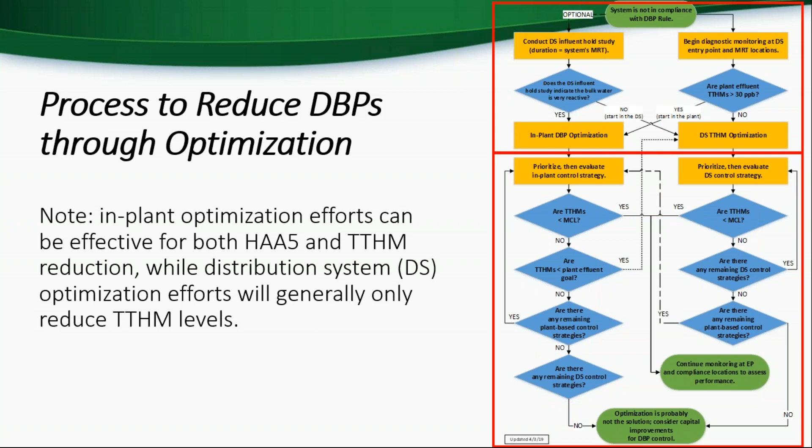The second stage is evaluating and implementing control strategies to reduce DBP formation. The first step in diagnosing DBP formation is to conduct a diagnostic monitoring study. This consists of collecting DBP samples from the distribution system entry point and maximum residence time locations to determine where the majority of DBP formation is occurring.

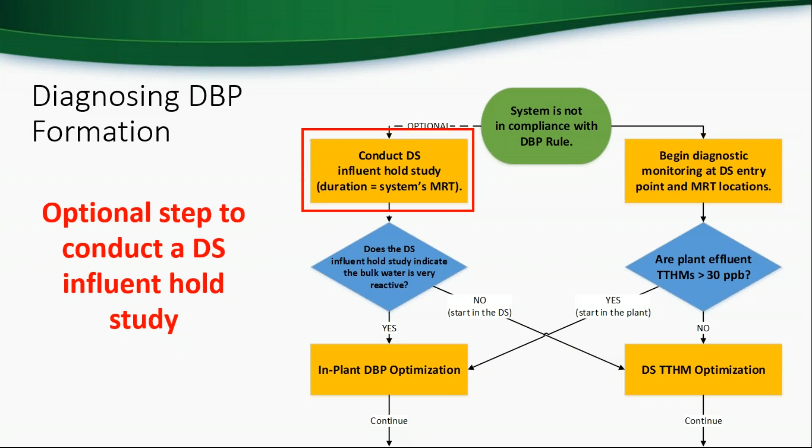In addition to the diagnostic monitoring study, an optional initial step is to conduct a distribution system influent hold study. Conducting this study may provide additional information related to disinfectant stability and DBP formation.

During webinars 2 and 3, we introduced approaches to prioritize DBP control strategies in both the treatment plant and the distribution system. The focus of today's webinar is going to be implementing DBP control strategies. This concludes the introduction portion of the webinar, and now I'm going to turn it over to Allison Dugan, also from US EPA, and she's going to provide a presentation on how to implement DBP optimization control strategies.

Thanks, Matt. Let me pull it up and we'll be good to go. All right, so as Matt mentioned, I'm going to get into some of the details of evaluating DBP control strategies.

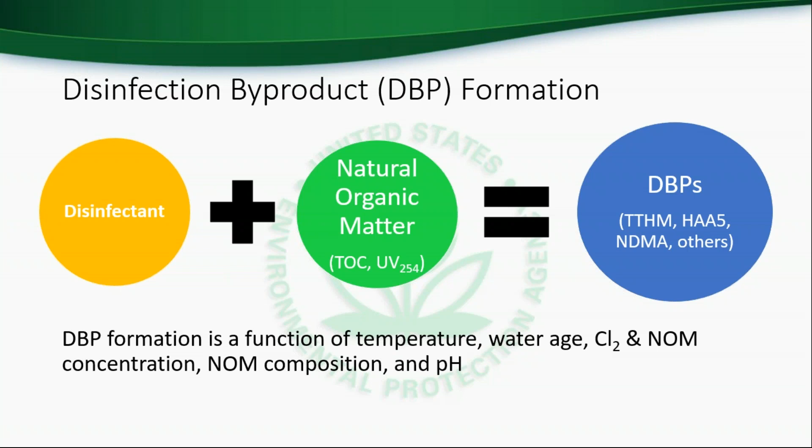Matt just pointed out that my slides are advancing, but... oh, maybe they all are. Yay. Okay, let's keep going.

You might recall from our earlier webinars that the potential operations-based changes that can be made in a water plant to reduce DBPs include optimizing oxidation or disinfection, which typically occurs in two general locations, three really. There's the pre-oxidation or pre-chlorination area, and that is what we consider prior to TOC removal.

Sorry about that. Then there's an intermediate location, which is typically like the post-sedimentation basin, top of filter location, and then finally the post-disinfection location.

While we also look at alternative pre-oxidants as part of this strategy, the real impact on DBP reduction is going to come from a system that can lower or stop chlorination in this pre-location, meaning chlorination that happens prior to TOC removal.

The second main thing that a system can do is look at lowering finished water TOC through optimized coagulation, and that includes looking at some combination of maybe coagulation dose, the coagulant they're using, and sometimes pH adjustment.

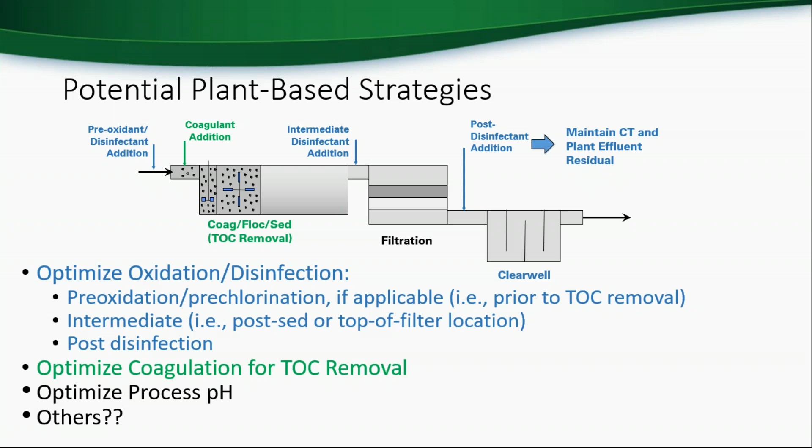Prioritizing plant-based optimization efforts was the topic of webinar 2, and as Matt mentioned, if you missed that and want more information, please refer to ASDWA's website for the webinar recording.

We've also discussed in previous webinars that there are many unintended consequences related to implementing DBP control strategies. We refer to them as unintended because they are secondary or negative impacts of implementing a strategy. However, hopefully with some planning and trying to anticipate them, they can be avoided or minimized, and it will be less of an issue for a water system as they implement the strategies.

We've listed all of them here and the two main control strategies they're typically associated with. We'll go through them more thoroughly during the presentation in the context of evaluating the DBP control strategies on the following slides. It's important to consider that some of these can be overcome, but others are going to be too difficult for a system to overcome. That's a consideration as well as you go through the process of evaluating the strategies.

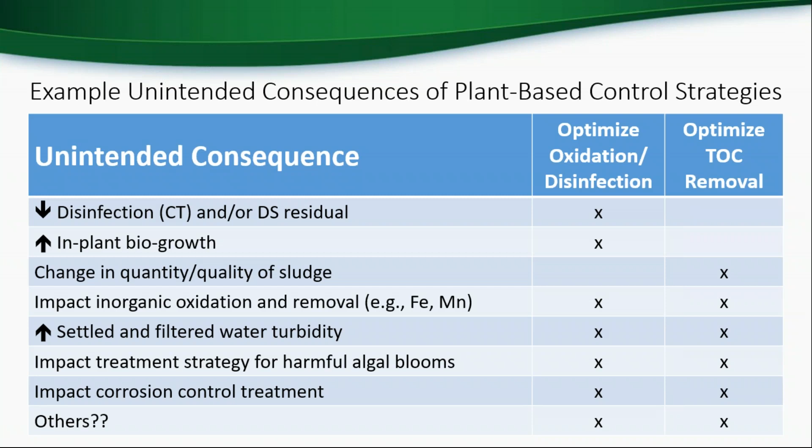Additionally, there are some resource considerations associated with the treatment strategies, which include costs associated with changing oxidation practices, optimizing coagulants, which again may require an increased chemical dose or an alternate coagulant or chemicals to adjust pH, all of which, or some combination of which, might improve TOC removal. And then there may also be cost considerations related to sludge disposal.

Costs associated with bench or pilot scale evaluations of alternate oxidants and coagulants and things like that may also be incurred by the system, as well as costs related to enhanced monitoring, whether it's monitoring equipment or additional reagents or sample analysis, whatever that might be.

There's also a resource related to staffing that needs to be considered. It might be skills development and time that they spend with optimization, or there may be other issues as well. And of course, there are other potential considerations which we haven't listed here that may come up for a system.

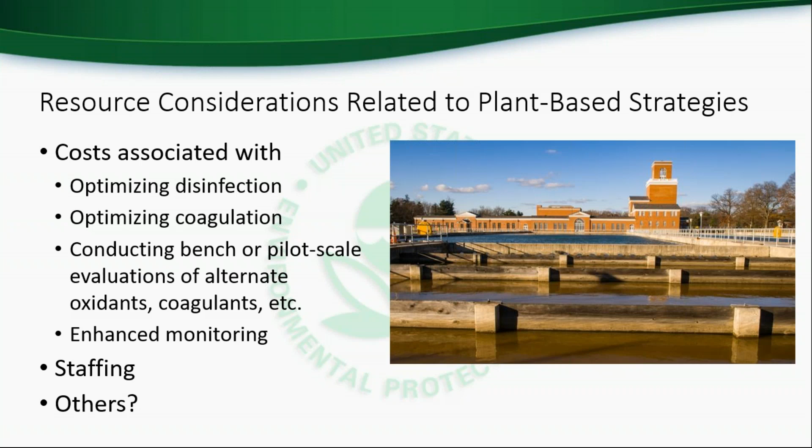So we're not really going to cover this anymore during this presentation, but we wanted to bring up some of the things that systems must weigh as they move down the path of implementing a DBP control strategy.

So shifting over to distribution system control strategies, you might recall this is primarily related to reducing water age in the system, which is generally effective for lowering THMs. Approaches to do this include managing tanks, flushing focused on water quality, and modifying system hydraulics to keep water moving through the system. Sometimes, too, design or treatment changes can be effective, and that might include something like installing a THM aeration system or a tank mixer.

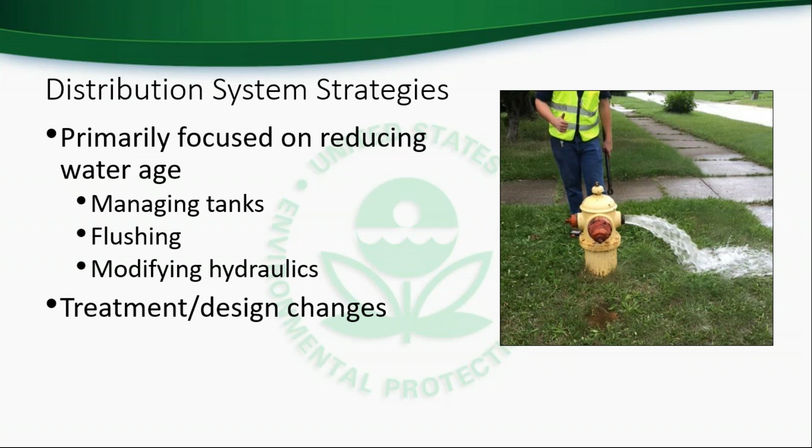And typically, these strategies can be utilized by a parent or a consecutive or purchasing system, so they have widespread applicability. Prioritizing distribution system optimization efforts was the topic of webinar 3, so if you missed that one and want more information, please refer to ASDWA's website for that recording.

As you might expect, there are unintended consequences related to modifying system hydraulics, including tanks. Some examples are listed here and on the following slides, and we're going to refer back to these slides in a little bit. So we wanted to provide them, and I'll go over these right now, but then they're also a resource.

If you, after this webinar, go ahead and apply some of this information. So some of the impacts might include reduced capacity for peak demands, such as during times of firefighting or line breaks, release of poor water quality into the system due to reducing tank levels, and low water pressure due to reduced tank levels.

That's basically going to happen when the tank levels are lowered, and if the tank is not well mixed and the water at the top of the tank that's brought into the system hasn't historically been released into the system, it might have a low chlorine residual. So this should be considered and monitored carefully if a system implements a strategy related to changing tank levels.

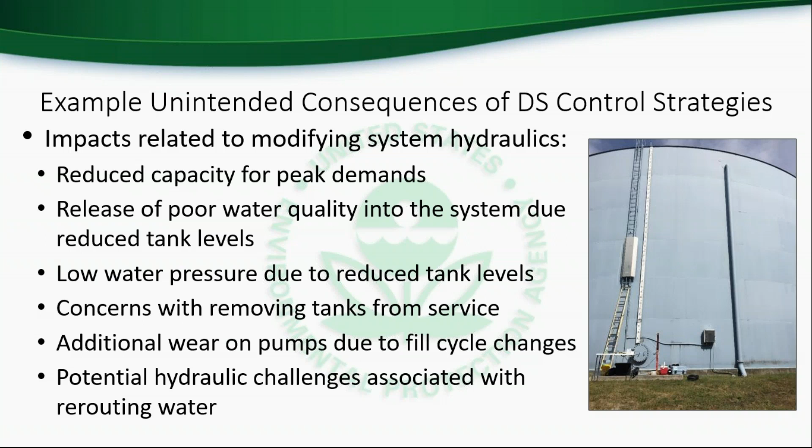And then some systems have concerns with removing tanks from service. So while that can take out some of the stored volume and potentially some of the water age out in the distribution system, that might be concerning for some. There's also additional wear on pumps due to changing tank fill cycles, and finally, potential hydraulic challenges associated with rerouting water to improve water quality.

Customer complaints may also result from implementing DBP control strategies, and some common ones include discolored water, which may result from flushing or changing flow patterns. This often results from higher velocity flushing or change in flow pattern, but there may be other things too that contribute to that as well.

And then customers may also complain if they're in an area where conservation is stressed, and there may be perceptions that flushing to improve water quality is concerning related to water conservation. And then finally, there are other unintended consequences as well, I'm sure, that you should talk with the system about if you're working with them to implement a DBP control strategy, and make sure you're mindful of that as you move forward.

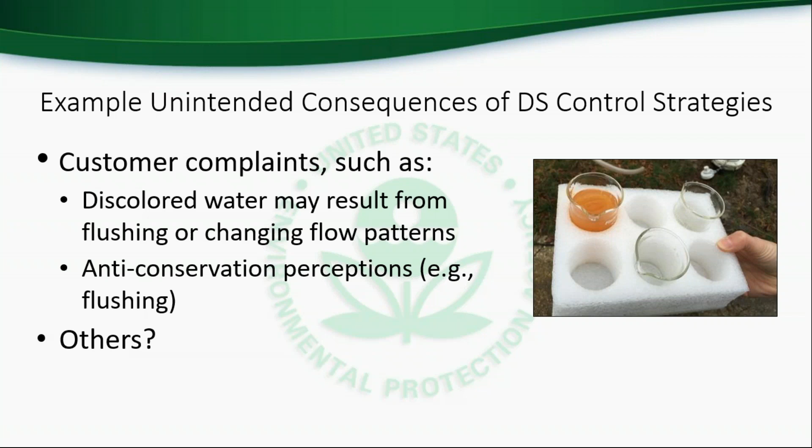So finally, here are some examples of resource considerations related to distribution system control strategies. They include costs associated with installing and operating treatment and/or design changes, such as booster disinfection, tank aeration, tank mixing devices, or flushing devices. Potentially costs related to tank maintenance services, such as inspections, cleaning, recoating, things like that, and costs related to the development and implementation of a unidirectional flushing program.

There's also resources, again, related to staffing, which we talked about a couple slides ago on the plant side of things. And then there might be concerns with revenue lost due to unbillable water, such as when a system is implementing flushing to improve water quality. And then other considerations as well, which might be system specific.

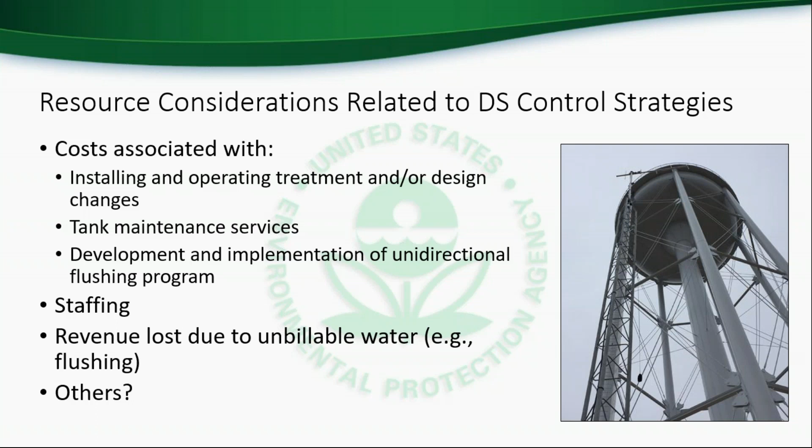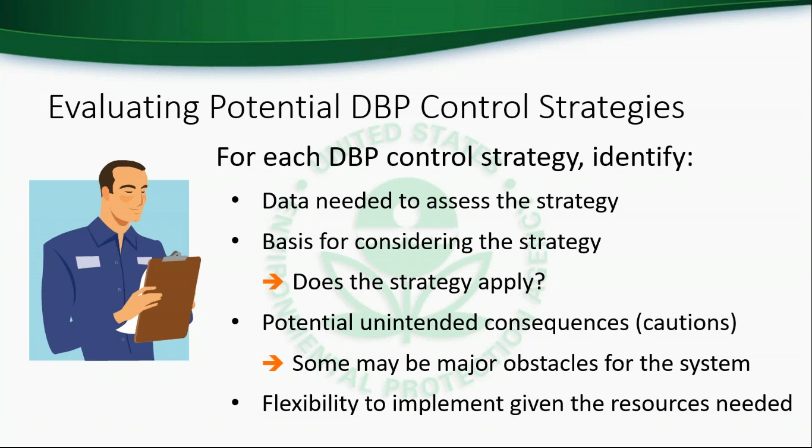Okay, so now let's get into the process for evaluating DBP control strategies. This basically boils down to gathering the data needed to assess the strategy, determining whether the strategy applies to the system, and if it does, reviewing the potential unintended consequences. As we discussed, planning for these is really the key thing. Finally, determining whether the system can implement the strategy given the resources needed.

Another thing to look at are the inactivation or CT calculations from each segment through the plant, which applies to both strategies. Finally, the raw and finished TOC can also be a consideration for this overall oxidation strategy. There are no hard and fast rules, but if the TOC in the water is relatively low and the chlorine dose is relatively high compared to the residual maintained through the plant, this implies something else in the water is exerting a chlorine demand, which needs to be considered. So you might need to collect data on inorganic parameters, potentially iron or manganese, to better assess the strategy.

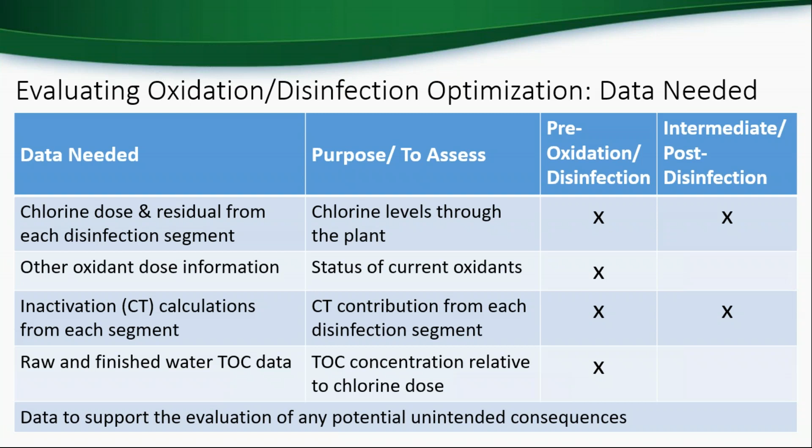So let's start with optimizing oxidation and disinfection and the basis for considering the strategy.

The first thing to consider is whether the strategy even applies to the system. If the system does not add chlorine prior to achieving TOC removal, they may still be able to optimize their pre-oxidation practices, but it might not have a significant impact on DBP formation. For this example, let's assume the system does apply. The next thing to ask is whether the system does or could achieve CT through the clear well, as opposed to needing a pre-disinfection segment to achieve adequate CT. If not, this could really limit the plant's ability to lower or eliminate pre-chlorination. But let's assume they can achieve CT through their clear well and keep moving through.

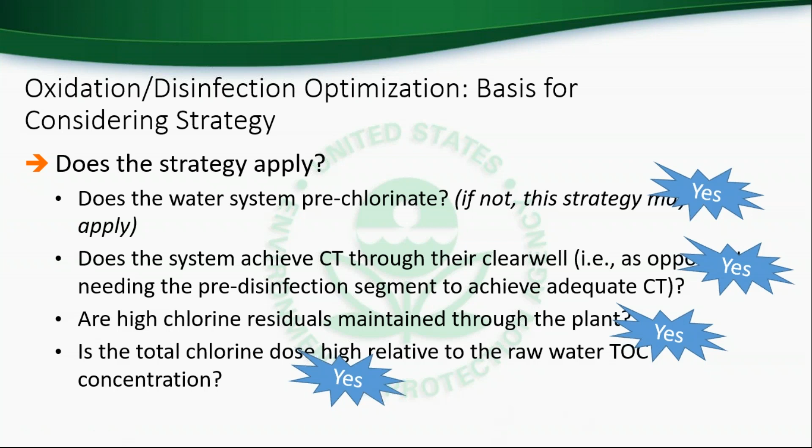The next two are somewhat lesser considerations, but assess whether high chlorine residuals are maintained through the plant. There's probably a treatment objective for this, such as to achieve CT, or it might be a case of 'that's what we've always done,' in which case you should probe that further. Finally, if total chlorine dose is relatively high relative to the TOC concentration, that might suggest room to lower the dose, but again you'd want to look into why that is. When considering whether this strategy applies, you don't necessarily need a yes answer to all these questions, but obviously the more the better in terms of potential to optimize and reduce DBPs.

Once we've determined that the strategy applies, you want to next consider the unintended consequences, which might present major obstacles for the system. Our hope is that if we think about these things ahead of time, they won't be concerning issues as the control strategies are implemented.

This first slide of unintended consequences primarily focuses on issues related to CT and in-plant disinfection. As you're assessing the strategy, look at whether a tracer study has been done to determine the contact time. If not, and a change in disinfection that impacts CT is being proposed, a tracer study will likely be needed. Similarly, determine whether their clear well is baffled, and if not, that might be needed to achieve CT. Sometimes that's a minor modification for systems and sometimes it's a more major modification, but it's going to be system specific.

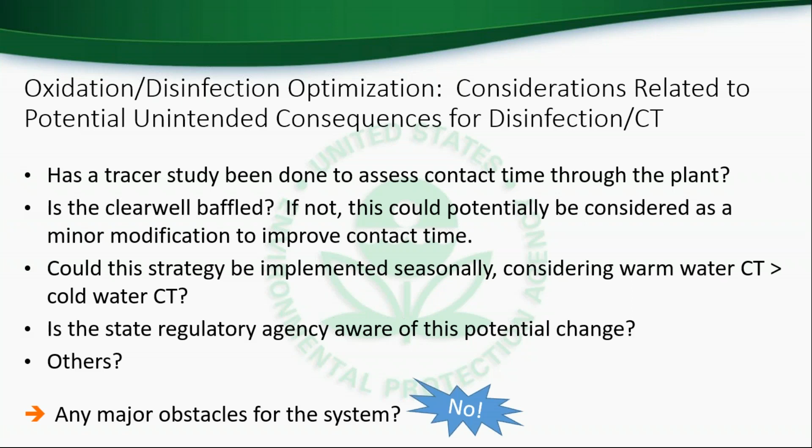Another option for systems to consider is implementing a strategy of stopping pre-chlorination seasonally, especially if the system has a hard time achieving CT in the winter but can easily do so in the summer. Any treatment change made to the system needs to be approved by the primacy agency, so water systems should make sure their state regulatory agency is aware. These are the highlights, but there may be others as well. As you assess this, determine if any of these are major obstacles for the system. If not, continue down the path of this control strategy.

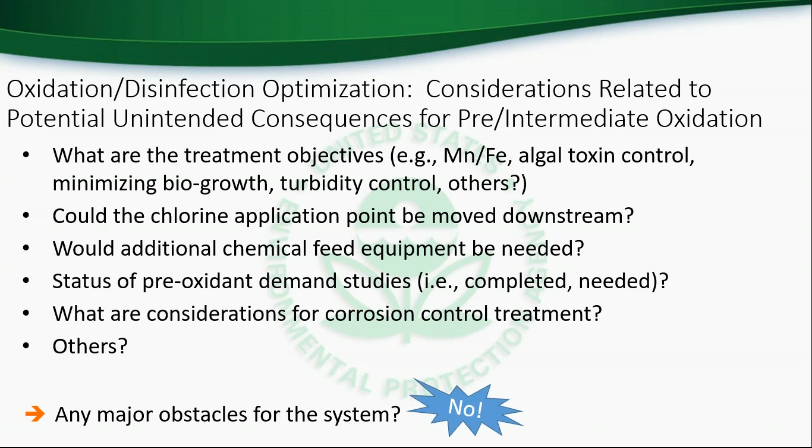On the other hand, if the system is going to stop pre-chlorinating, they'll likely need to evaluate other oxidants. You need to determine whether this has already been done, and if not, what kinds of studies might be needed before implementing this potentially at full scale. There are also likely considerations for corrosion control treatment if this change is made in the plant, and there may be other considerations as well which we haven't listed. As you consider these, again, if none are anticipated to be major obstacles, continue down the path of implementing the strategy.

Now let's look at some unintended consequences that might arise from optimizing the intermediate or post-disinfection location. At this point in the water plant, many treatment objectives related to pre-oxidation have already been addressed, so it's more a matter of making sure CT through the filters and/or clear well isn't compromised, as well as maintaining a plant effluent disinfectant residual that will maintain a residual out in the distribution system. The other thing we really want to emphasize is that reducing the disinfectant dose at the intermediate or post location typically is not going to have a measurable or significant impact on DBP formation, especially in a free chlorine system that has high water age. So compromising the amount of chlorine added at this point for the sake of DBP control is something a system should very carefully consider, because it really may not have a big impact.

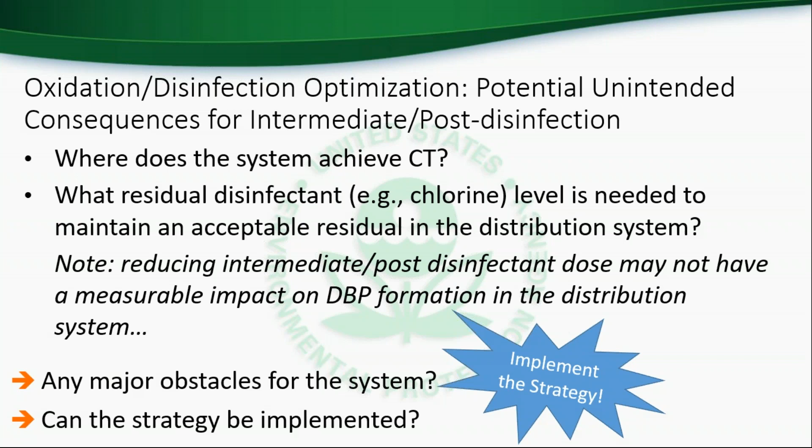So assuming the issues listed on the slide, as well as the ones we previously discussed, are not major obstacles and/or can be overcome, and the strategy can be implemented given the resources needed, the system should move forward with implementing the strategy focused on optimizing oxidation in the plant. It should be done in a stepwise manner, making gradual changes and monitoring, making sure you continue monitoring not only the impact on DBPs, but also whether the strategy might be impacting other treatment objectives, including CT. That wraps up the strategy of oxidation and disinfection optimization.

Now we're going to move over to evaluating optimized coagulation for TOC removal. The data needed for this strategy includes raw and finished water TOC data, coagulant dose and pH data. As we discussed in webinar 2, it's really good to assess whether finished water TOC tracks the raw water TOC, whether coagulant dose changes with raw water TOC, and what the level of coagulation pH is. You also need TOC performance ratio data, which will indicate whether the system has historically met the TOC removal requirements of the DBP rule, by looking at actual removal or by meeting one of the alternative compliance criteria. If the system has any recent jar test data, these might provide additional information about potential for TOC removal. Finally, any data needed to support potential unintended consequences is also going to be needed.

So when considering whether the strategy might apply to the system and whether the system has potential to optimize their coagulation practices for additional TOC removal, review the following. Are there jar test data that suggests the system has potential to achieve additional TOC removal? If so, this strongly suggests that it might be a viable strategy. And if there are no jar test data, could some jar testing potentially be done?

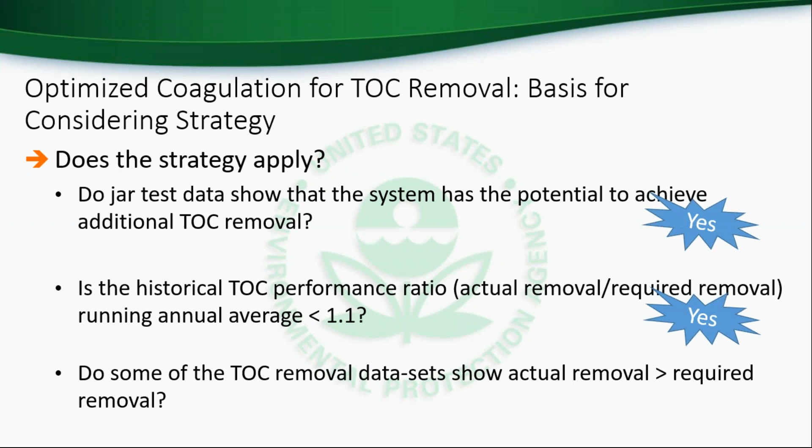So additional considerations when assessing potential for additional TOC removal include, did the system operate at a relatively constant coagulant dose with little or no consideration to raw water TOC? And so again, this might indicate that additional TOC removal could be achieved at higher doses.

Is the system using a coagulant that might not be effective for TOC removal, like maybe more of a polymer? And if so, seek to understand why they are using this coagulant and whether there might be some flexibility to make a change, of course, starting with jar testing to assess that.

Is it possible that the process pH could be further optimized for TOC removal? Generally, TOC removal is going to improve as pH decreases, but these benefits can be water and coagulant specific, so definitely something to evaluate through jar testing, but for some systems, that's a viable strategy.

And then finally, if available, is the majority of raw or treated water SUVA greater than 2? SUVA is a measure of UV254 divided by dissolved organic carbon, and a SUVA value greater than 2 suggests some potential for additional TOC removal. So if these data are available from the system, they should definitely consider that.

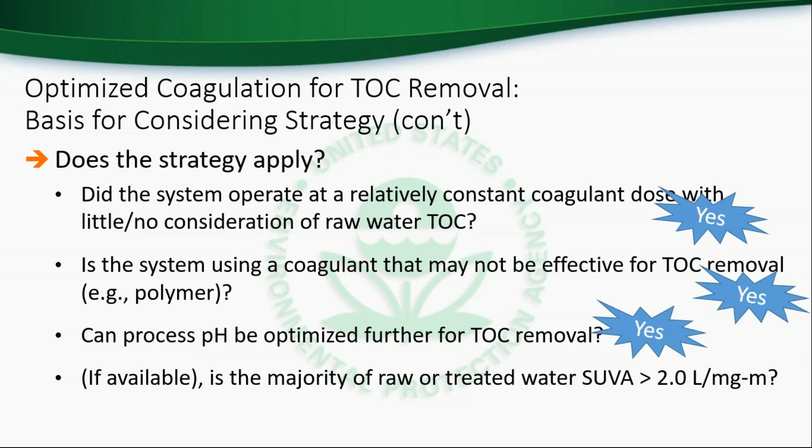Assuming the issues listed on the slide are not major obstacles and or can be overcome, and the strategy can be implemented given the resources needed, the system should move forward with implementing the strategy focused on optimizing TOC removal. Of course, this should be done in a stepwise manner, making gradual changes and monitoring not only the impact on TOC removal and DBPs, but also the impact that the strategy might have on other treatment objectives.

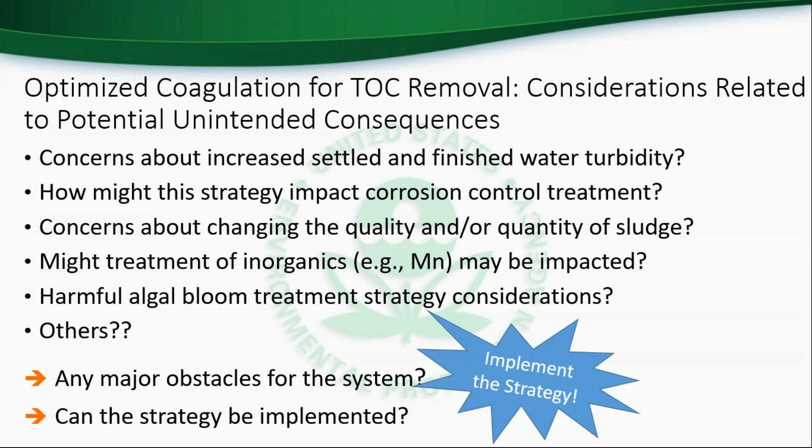Okay, finally, let's look at distribution system control strategies, starting with the data that would be needed to assess them relative to the 3 main strategies related to reducing water age, which includes managing tanks, modifying system hydraulics, and flushing. And as you can see, the data that we typically need supports most or all of these strategies.

First, if the system has any distribution system chlorine residual data, this may be indicative of areas of poor water quality or high water age in the system. Reviewing this data can provide some insight about areas of the system that might benefit from these strategies. And the chlorine residual sample locations, though, may or may not be near the DBP compliance locations.

So that may be the case that you've got residual data from areas that are away from the stage 2 locations, but sometimes implementing control strategies such as rerouting water or related to tanks can impact a larger area of the system and improve it much more holistically rather than just at that one stage 2 location. And really that's what we're seeking, is to have overall improvement in water quality in the system.

We also need information about water storage tanks that the system has, including tank level data and tank characteristics. Details about this were provided in webinar 3, and this information is used to estimate turnover time and mixing characteristics of the system's tanks using the spreadsheet we provided in that last webinar. If you're not familiar with that, I'd encourage you to go back to the last webinar and take a look. Also, in the area of AWWA's website that provides a link to the webinar, you can download the tank spreadsheet and the protocol for using it.

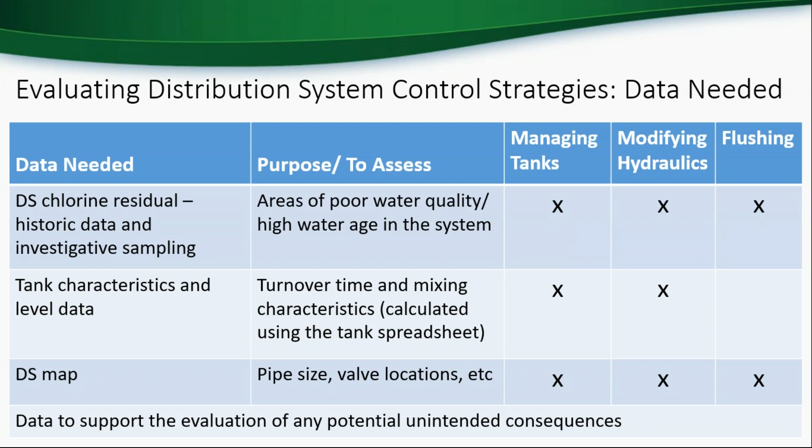And then finally, any data needed to support the evaluation of potential unintended consequences is also helpful, and that might include pressure data or customer complaint information. And if this kind of information can be shown on the map, that's even better.

We discussed in earlier webinars that distribution system optimization is most likely going to be most effective in systems that meet the following criteria, and this is the basis for considering the strategy. In a system that has plant effluent THMs less than around 30 parts per billion, that suggests water age rather than treatment is contributing to the elevated DBPs. If you find that the system has not optimized treatment and the THMs are significantly greater than 30 at the plant effluent location, distribution strategies can still be implemented, but often both plant and distribution system optimization will be needed to reduce DBPs to a desired level.

Similarly, the results from the hold study suggest that the bulk water is not very reactive, and again these are the samples collected from the bottles throughout the hold study. This implies that the plant may already be optimized with respect to DBP control, and that water age in the distribution system may be contributing to low residuals and elevated DBPs. And then finally, the system still has potential to optimize in their distribution system because they've not fully implemented distribution system optimization related to tank operations, flushing programs, system hydraulics, et cetera. Then they would be a good candidate for pursuing distribution system optimization.

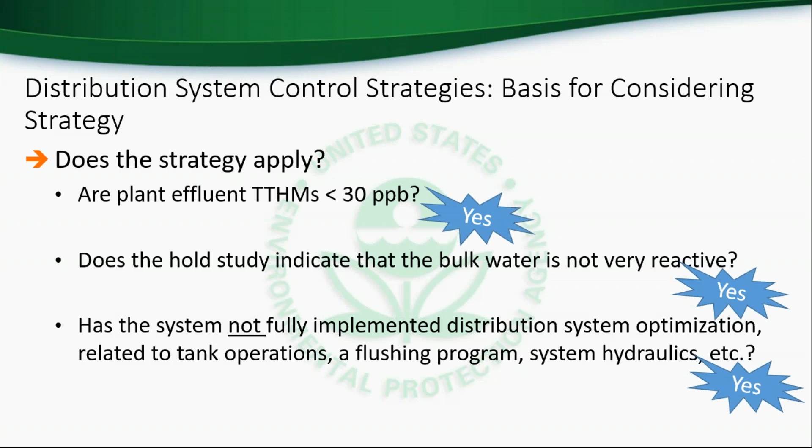The unintended consequences associated with distribution system control strategies fall into a few main categories, including customer complaints related to water quality, operational activities, and things like pressure, hydraulic concerns, which might include challenges related to maintaining pressure, issues that might arise from rerouting water, which may also spark some customer complaints. And then, of course, there's our nebulous others category, which systems may have to deal with, and those are going to be system specific. I presented these earlier on slides 9 through 11, so in the interest of time, I'm not going to relist them.

So assuming none of these are major obstacles that the system cannot work around, and that distribution system optimization can be implemented given the resources needed, the system should move forward with these types of strategies. Again, it should be done in a stepwise manner, making gradual changes. In other words, don't change all the tank levels at once. Also, monitoring in the distribution system should be done not only to assess the impact on DBPs quarterly, but also the impact on other water quality parameters such as disinfectant residual, pH, and temperature, and other parameters of concern, which you'd probably want to monitor on a much more frequent basis than quarterly.

So in summary, this process might seem overwhelming, but really it boils down to pulling together the system information related to water quality and operations that you need to assess the strategy, determining whether this strategy would apply to the water system you're working with, and then considering the potential unintended consequences and resource needs for the strategy. And if the system has the flexibility to implement the strategy, we encourage you to develop an implementation approach that includes careful, stepwise implementation and monitoring to understand the impact of the strategy and potential unintended consequences.

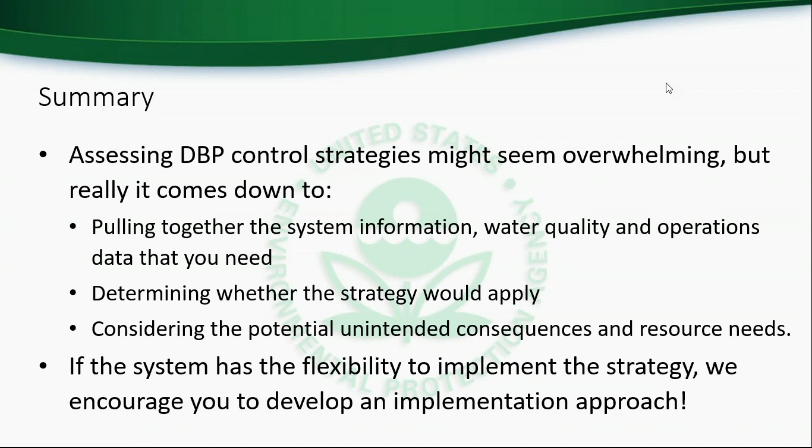So with that, I am going to pass this over to Jackie Logston from the state of Kentucky, who is going to talk about a case study with her systems, with a group of her systems.

Hello, my name is Jackie Logston, and I provide drinking water technical assistance with the Kentucky Division of Water, Department for Environmental Protection. I'm going to talk about a lot of the same things that Allison was talking about, through a case study. She said at the very end that a lot of this can seem overwhelming, and that's true. Keep in mind as I go through my presentation that this is work that has been occurring over the course of the last 4 years or so, so you're really not going to be addressing everything all at once.

Okay, if I can get my slides to advance. Let's see here. I'm not sure. Jackie, this is Allison, I had a little trouble with it too. I finally ended up hitting one of the arrow buttons. I tried page down, I tried a click of the mouse. There we go, I got it. Yep, okay, and we got it here too. Thanks, right, thank you Allison.

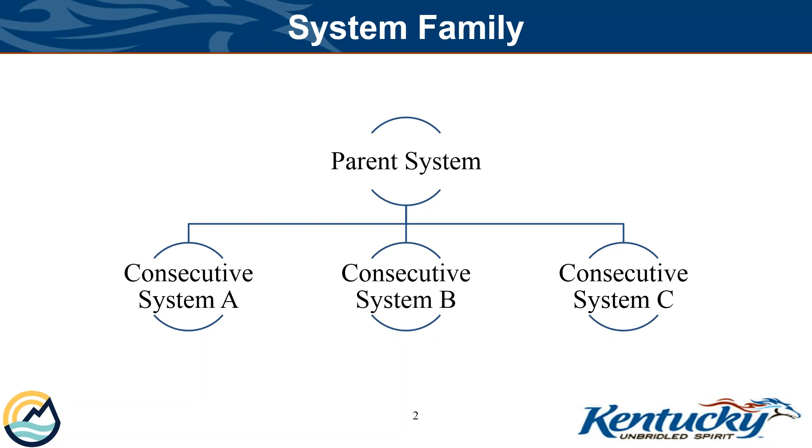Okay, so I'm going to talk to you about a system family that's located in the region of Kentucky that I cover. It consists of a parent system with 3 consecutive systems. As I go through talking about these systems with you, I'll refer to them as consecutive system A, B, and C. Starting with the parent system, they have an 8 MGD water treatment plant with membrane filtration with an average daily demand of about 2.6 million gallons per day.

They have 4 distribution system storage tanks with a combined capacity of 7.5 million gallons. With this system, you can see with the combined capacity of the tanks, they've got a lot of oversized lines and a lot of parallel lines. This is kind of a good example of they had the money and just built it as big as you can. And now they're really having to deal with the unintended consequences of all that extra water.

They provide 100% coverage to the 3 consecutive systems that I'm going to talk about today. They do provide a small portion of water to a 4th consecutive system, but that system gets the majority of their water from another parent system, so I didn't include them in this case study. The parent system serves a system population of about 28,000 with a combined population of about 38,000.

The first DBP violation that they received was for TTHMs, and that happened in the 3rd quarter of 2016. Remember that date because I'm going to go back to that here in just a minute. They returned to compliance in the 3rd quarter of 2017.

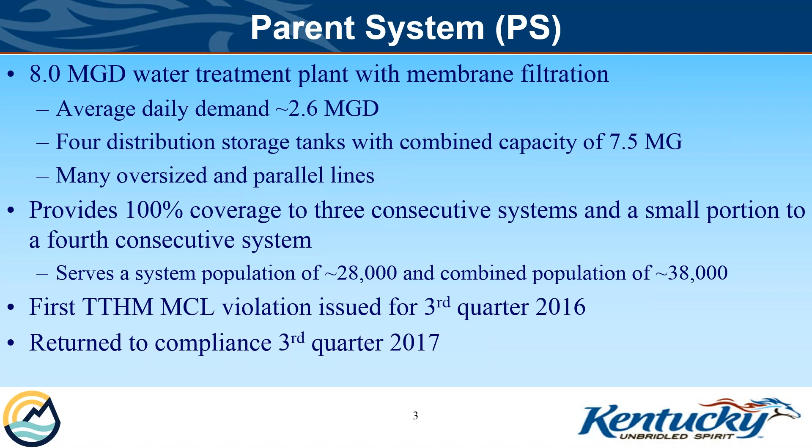A little background on consecutive system A. They purchase all of their water through one master meter served via a 16-inch line. And truth be told, that 16-inch line acts pretty much like an underground storage tank because there's not a lot of usage on that transmission line serving that master meter. They also have 2 distribution system tanks with a combined capacity of about 600,000 gallons.

They serve a small population of about 1,400. Their first violation was for TTHMs, and that happened in the 3rd quarter of 2014. So with the parent system, they got their violation in '16, which was 2 years after the consecutive system was out of compliance - I'll talk more about that in a little bit. They returned to compliance in the 4th quarter of 2017.

Consecutive system B, again, purchases all their water through one master meter served via a 10-inch line. They have 3 distribution tanks with a combined capacity of about 500,000 gallons. They serve a population of about 4,700. Their first TTHM violation was also the 4th quarter of 2014.

With these consecutive systems, they all went into violation at the same time because it happened as soon as they had 4 quarters of stage 2 monitoring data. So as soon as compliance kicked in, they were all out of compliance from the very beginning of that. They also returned to compliance in the 4th quarter of 2017.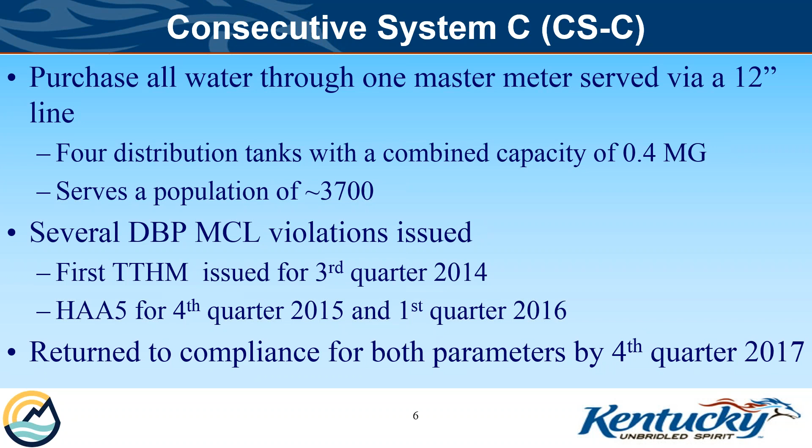They've had several violations as well, beginning with the 3rd quarter of 2014 like the others. They also had 2 violations, 2 quarters where they were out of compliance with HAAs, and also returned to compliance like the other consecutive systems by the 4th quarter of 2017.

Something we've done in Kentucky is implement the distribution system optimization training, and we've had a large success using this training. It was a situation where we had a lot of systems out of compliance whenever stage 2 kicked in, and a lot of them were consecutive systems. We really needed a way to reach all of these systems, as many as we could, as quickly as we could, to start getting this information out to them. So this distribution system optimization training really fit in well.

The first one we conducted was in August of 2015. This is the one that included the system family I'm talking about today. We open the training up and host them regionally, and now we've had several in different locations across the state.

We invite, in particular, systems that are having compliance issues, but we open it to all systems in the area. When we have a system out of compliance, if it's a consecutive system, we also try to get the parent system in the training, whether they're out of compliance or not, because it really helps to get systems working together.

In this case, the parent system and all 3 consecutive systems attended the training. At the time, the parent system was still in compliance, but the consecutive systems were in violation. When systems are referred to enforcement, they have to submit a corrective action plan telling us what actions they'll take to return to compliance. These systems were able to include attending this training as one of the items in their corrective action plan. The training was well received, but they still needed some additional encouragement to start implementing these strategies and working together.

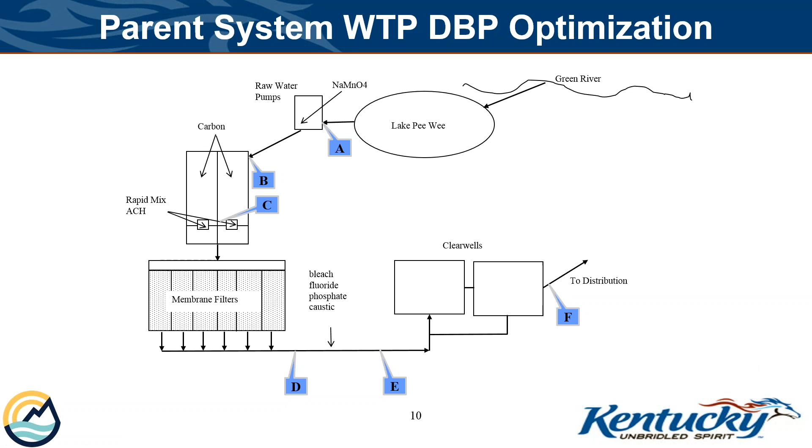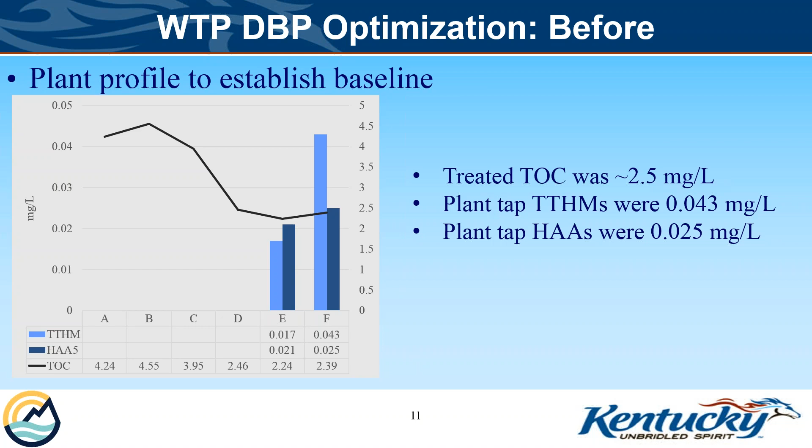To establish a baseline, we conducted a plant profile. If I go back to this for a second, you can see the different areas—A, B, C, D, E, F—were the sites where I collected samples to conduct the profile. The goal was to try to capture what was happening with each treatment process. We started out with a TOC of about 2.5 milligrams per liter. Plant tap TTHMs were about 43 parts per billion, and the HAAs were 25 parts per billion. So that's what we had initially.

Our potential control strategies were to improve TOC removal and optimize pre-oxidation. We really did most of the work through jar testing to establish if it was an applicable control strategy they could implement. Again, they were limited on the coagulation process, and also on the types of coagulants they could use because of the membrane filtration process. We did some jar testing to determine proper dosage, but there wasn't a huge change in what they were doing with their coagulant.

The pre-oxidant—like I said, they were already feeding sodium permanganate. They did explore other options, but decided sodium permanganate really was the best. They have some manganese issues at different times during the year, and find permanganate is most effective for that process. So some time was spent making sure they were feeding the sodium permanganate at the right location, feeding it to demand.

A lot of time was spent optimizing the carbon feed. They are limited again, because of the membrane filtration, on the types of carbon they can feed—in particular, it's called the gold number. A carbon that is too sharp can damage the membrane filters, the fibers.

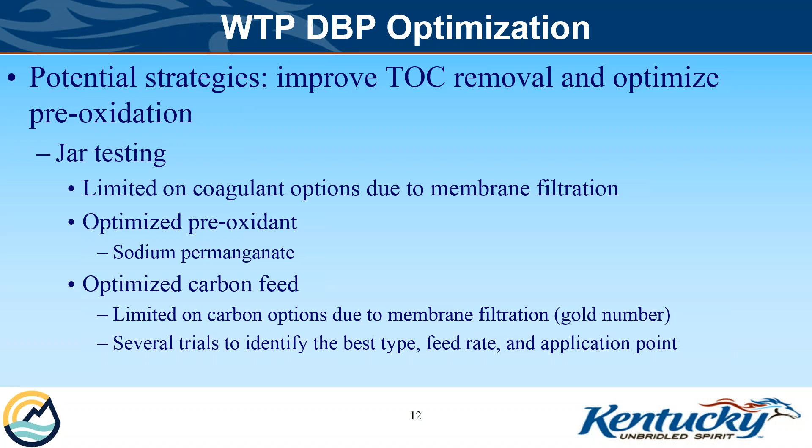impacted the results that they got from their carbon feed. And again, this was a process, several months worth of jar testing and trials, but they saw some improvements for sure. Some improvements that made a pretty big impact out in the distribution system because they were changing that reactivity of that water, making it more stable.

And so there was a drop from a 2.4 to a 1.7 on the TOC, treated TOC, and then the TTHMs went from a 43 to a 26. I don't have the HAA5 data here because this was done in-house, and they have a THM analyzer. I know that type of purchase is not always an option for some of the smaller systems, but that was

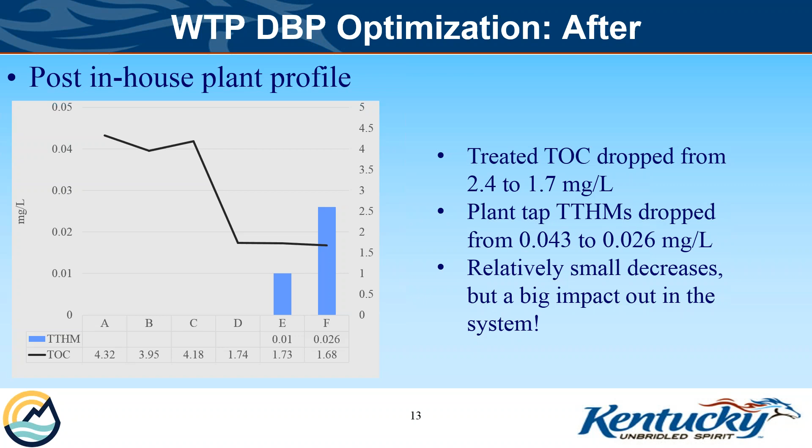something that they were able to purchase and have utilized. And so you can see that the work that was done at the water plant, and you know, this was a system that was doing a good job. They were not pre-chlorinating, and they had membrane filters, and they felt like they were doing a really good job, and they were, but it was a situation where they could still make some improvements that would have an impact.

And then still talking about the parent system, moving out to the distribution system, they started implementing some of the control strategies that they learned through the distribution system optimization training. One of the first things that we do in that training, and there's a workshop within that training on identifying critical sites, critical locations for increasing the monitoring out in the distribution system. And like Allison said, it really is about the water quality throughout the entire system, not just at those compliance sites. So critical locations would be dead ends, large oversized mains, parallel lines, low flow areas, tank effluent, areas

in the system that you know you have challenges with the chlorine. And the two things that they were monitoring were chlorine and TTHM, because again, they had that in-house THM analyzer, and they can run those tests pretty inexpensively and pretty quickly. So they were able to gather up a lot of data in the distribution system.

They also installed a monitoring panel at the main 3 million gallon tank. That tank that I'm referring to, all of the water that serves the whole system and the consecutive systems, all the water goes through that tank first before it's disseminated out into the distribution system. And so it was just a great asset to have that real live data where they could see the chlorine and the pH and the turbidity, conductivity, pressure going in and out of that tank at all times.

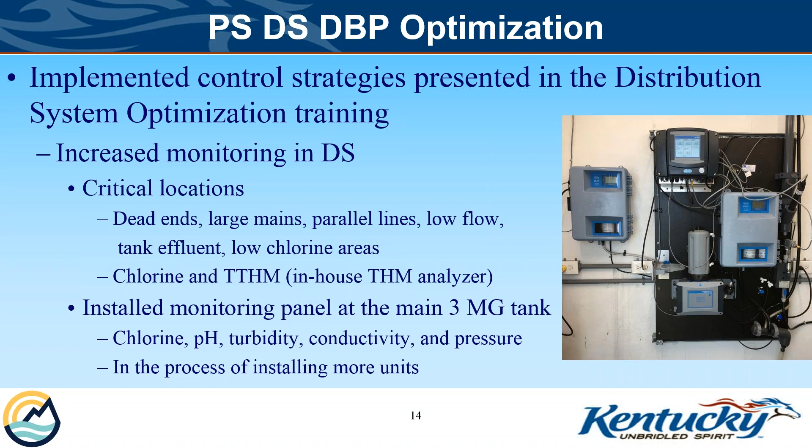They're also in the process now of installing more units at other areas in the distribution system because they find this data so valuable. So they increased their monitoring.

The next step was looking at optimizing tank operations. And Allison touched on this in her presentation, they had to consider, and again, the unintended consequences, but they were looking at how much could we lower tank levels without impeding pressure or fire protection and that sort of thing. They were able to make some tank level adjustments and also change some of the operations with their fill and draw levels to encourage better turnover in their tanks.

They cleaned some of their storage tanks, and the biggest improvement that they made was to that main tank that I talked about on the last slide. They recoated the interior. It had been a long time since the tank had been taken down and cleaned. There was some corrosion issues in the tank. There was stagnation issues in the tank. So they recoated the interior and they installed a mixing system.

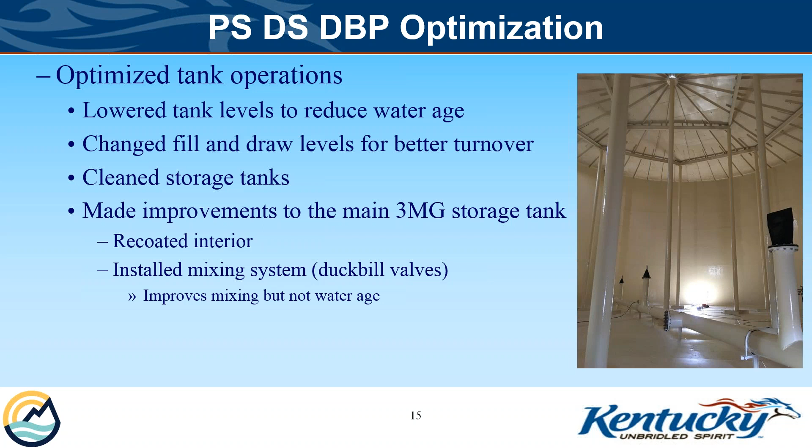And I want to make sure and tell you here that mixers improve the mixing, but not the water age. So you still have to have some movement in and out of that tank to keep the water fresh. If you're mixing old water, it's still old water. But a mixing system can be beneficial in a situation like this one for sure.

Again, this system had what they considered a good flushing program. The entire system was being flushed two times a year, but there were some improvements that they could make to it. So they do try to do some unidirectional flushing where they can. That's not always possible, but conventional flushing along with that, they do that twice a year.

They also do some low velocity flushing, we call it soft flushing, in critical areas quarterly. This is in areas where they were having some chlorine issues, or using that THM analyzer, they knew they had some areas. They're looking at the whole system, not just their compliance sites, but where in the system they see the THMs increasing, using that to do some turnover flushing where they're doing the cleaning, the scouring twice a year, but on a more regular basis they're turning that water over because they have so much storage and so many large lines, keeping that water turned over.

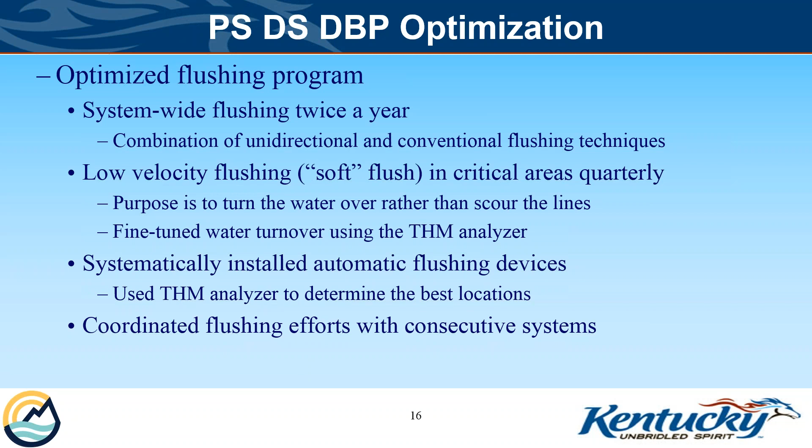They also systematically installed automatic flushing devices, and again use that THM analyzer to determine the best locations. And then something else that came out of that first meeting was coordinated flushing efforts with their consecutive systems. They would let the consecutive systems know when they were going to be flushing, so the consecutive systems could piggyback off of their flushing, so that when they started flushing from their master meter, they were pulling through that freshly flushed water from their parent system.

They also did some valving manipulation to eliminate some hydraulic dead ends and get water flowing in different directions. And they're working on a plan to eliminate some of the parallel lines. So they are trying to address that in some manner, but that's a difficult fix. It can be expensive because they may have two lines running together, a situation where it was a small line, they needed more capacity, and instead of upgrading the line they laid another one next to it and had customers tapped into each of them. So that's going to be a long process for them, but it is something that they're addressing.

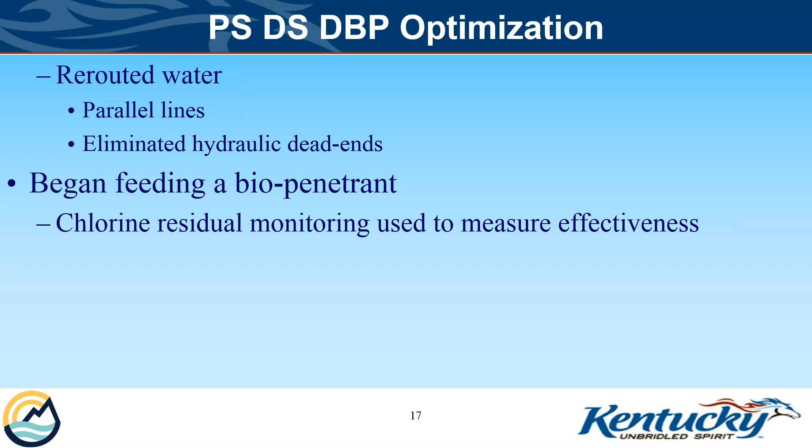And then something else that they did, separate from what came out of the optimization training, was that they began feeding a biopenetrant at this system, to address any biofilm issues that they may have had out in their distribution system. And they monitored the effectiveness of it by chlorine residual monitoring.

This chart here is looking at the long-term trend of the trihalomethanes. It is taking the maximum LRAA from each quarter and doing an average of the max LRAA. The solid line is the long-term goal, set at 60 for all of their sites, figuring in the max. The average is the dotted line, and you can see that they're falling below that long-term goal. This is the parent system, and of course the 80 is the MCL, but this system went from being out of compliance to now meeting optimization goals. So that's quite a success that they have demonstrated there with the control strategies that they implemented.

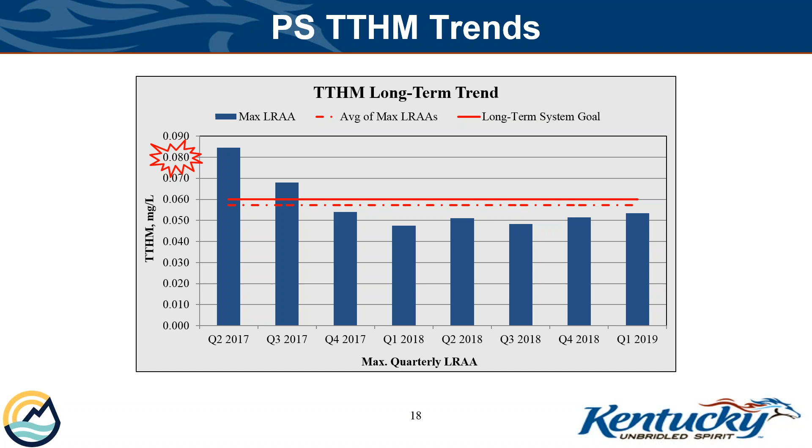There is a tank influent and a tank effluent. They have two tanks in this system. We just included one of the tanks in the profile, and that tank had a separate inlet and outlet, but it was a unique setup because that tank was used for fire protection for an industry. So the effluent was actually a riser pipe in that tank that would keep it from falling below a certain level. The water would become stagnated, but there were several feet of water at the bottom that could not get out because of that riser, to maintain a minimum level in the tank. So that was one of the challenges they were looking at there.

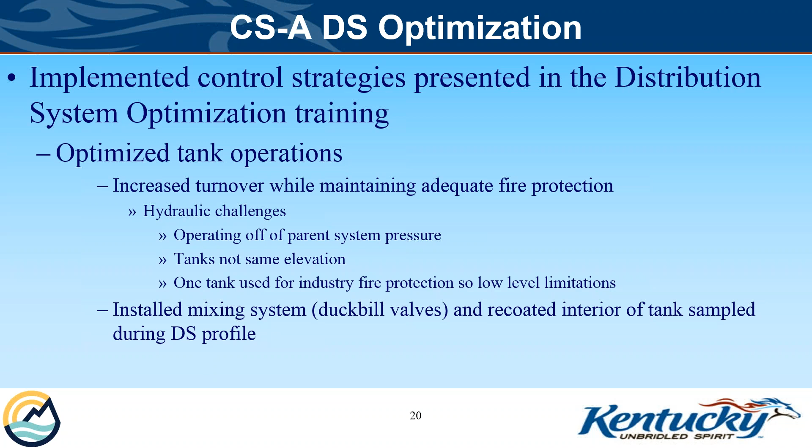Those were the things they had to evaluate when changing tank operations. They really ran into hydraulic challenges in this system because they were operating off the parent system pressure, and the two tanks they have do not operate on the same elevation, with a different elevation from the parent system. I also talked about the tank used for fire protection with that riser pipe. They went into that tank in particular and removed the riser pipe, so they didn't have that issue anymore. They also recoated the interior of the tank due to corrosion issues, and installed the same duckbill valve mixing system in that tank.

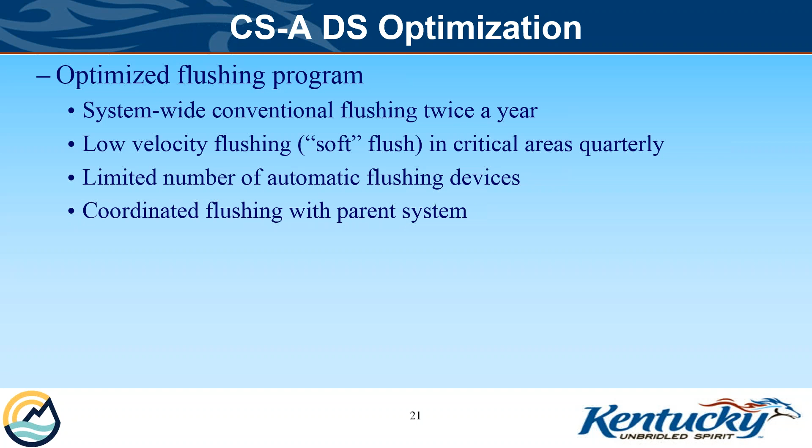Optimization efforts for their flushing program include a system-wide conventional flushing, aiming for twice a year. They do some low velocity soft flushing in critical areas quarterly, again looking at the whole system, not just compliance site areas. They were able to install a limited number of automatic flushing devices, and coordinated flushing with the parent system.

I'll move on now to consecutive system B. Again, we conducted some diagnostic monitoring of that system, and one of the sites that they were really challenged at, their two compliance sites, would be the SM2 and the SM4.

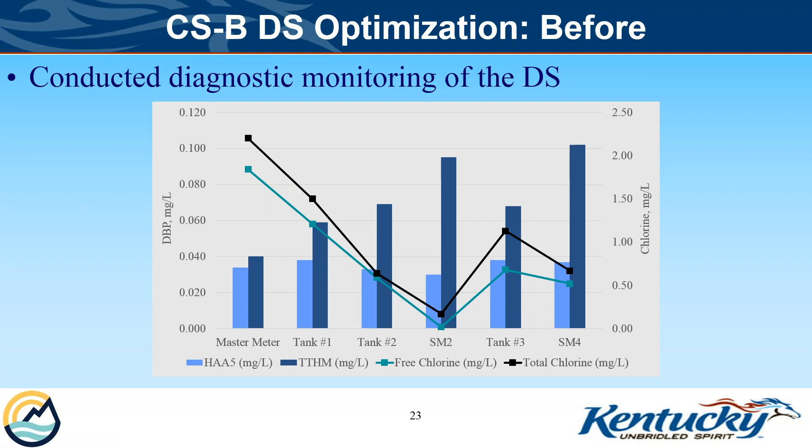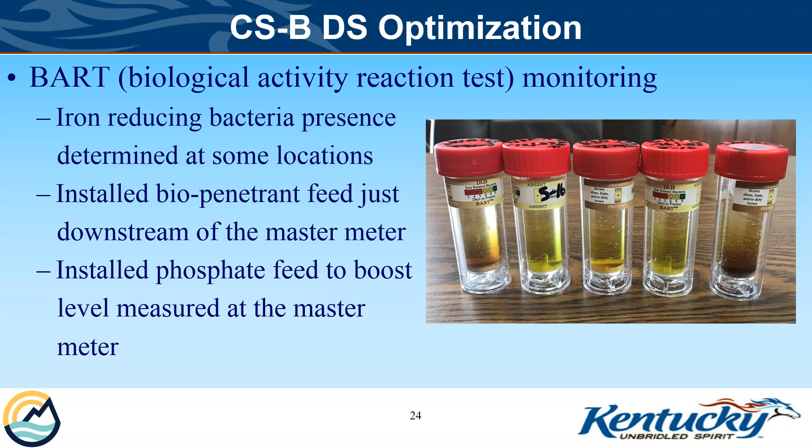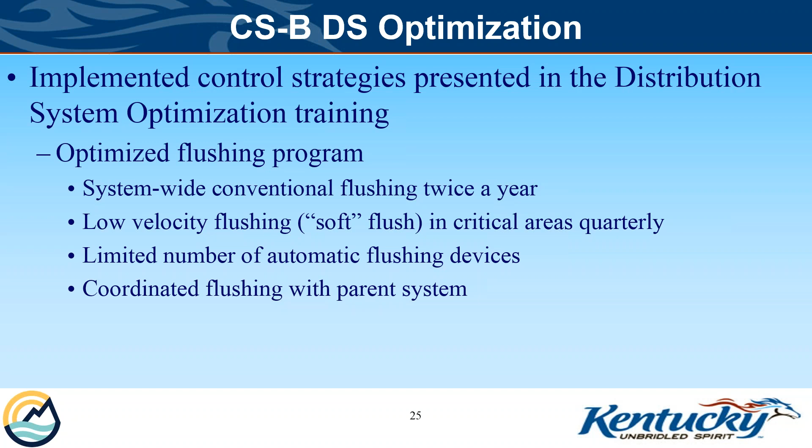A similar flushing program with this system: they try to do a system-wide conventional flush twice a year. They also do some low velocity flushing to turn over those long lines, since these consecutive systems are rural areas in Kentucky - long lines with a low number of customers going way out. Keeping those lines turned over is essential in keeping good chlorine residual and keeping the water age down. And they also coordinated flushing with the parent system.

With their tanks, they made some adjustments where they could to the fill and draw levels to increase turnover. They believe they lowered some levels in some of their tanks to reduce the amount of water in storage. They also had the duckbill valve systems installed in all of their tanks and cleaned all of their tanks as well.

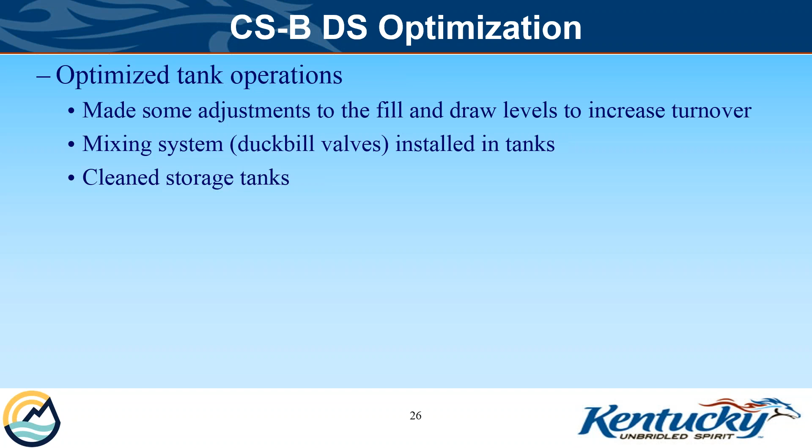They implemented control strategies that they learned in the training as well. A challenge that this system had was they have a limited number of flush points. They don't have that many fire hydrants. It's not a fire rated system. Again, we're talking a rural area, but they just don't have very many flush hydrants either. So they do the best that they can flushing, but that is a big challenge still to this day, and that's something that's going to come with time and money, is to install more flush hydrants so that they can turn the system over better.

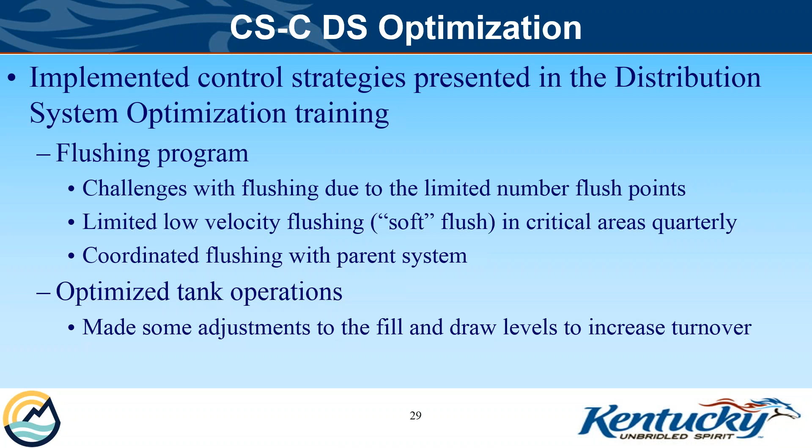And then with their tank operations, they did make some adjustments to the fill and draw levels to increase turnover, and lowered some tank levels in areas where they could without having a negative impact on pressure.

So really what we learned through all of this is that the success that these systems achieved really required a holistic approach. Without the parent system being willing... and they started their work before they were out of compliance, but it really took them being aware of the system as a whole, not just their little kingdom, but the system as a whole, and everyone working together.

All of the systems have maintained compliance since the third and fourth quarters of 2017, and some of them are even achieving optimization goals. So we consider that a great success.

Like I said earlier, they've continued meeting on an annual basis. They get together for lunch and they talk about compliance. Sometimes I'll go and give a little presentation on what everybody's numbers look like. They talk about coordinated efforts, any projects that any of them have going on, sampling with the THM analyzer that the parent system owns. They do sampling for their consecutive systems if they want them to do that. I think that this is just really a great example of the benefit gained by communicating and working together.

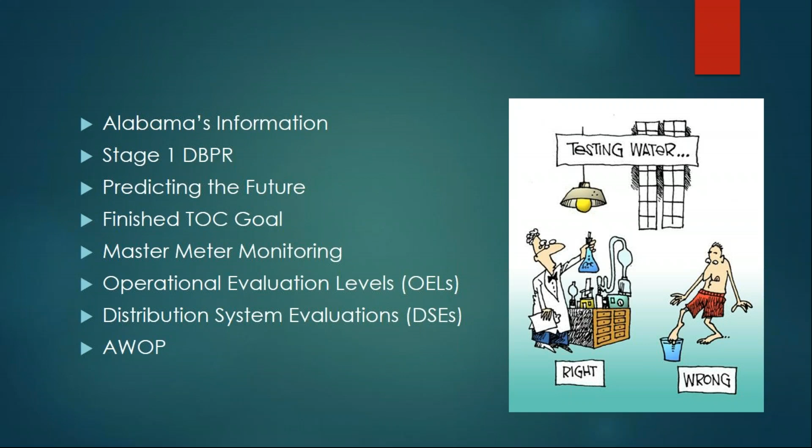So some basic information about Alabama. We currently have 510 community water systems, which is comprised of 77 surface water systems with 98 surface water treatment plants amongst them, 244 groundwater systems, 150 purchase systems, and 39 groundwater purchase systems.

We currently have approximately 240 systems on quarterly DBP monitoring. Other things that has also been beneficial but also a hindrance in the state is we have a high level of interconnection between our water systems. And one of the biggest things that we also have going on in our state is all of our community water systems are on free chlorine.

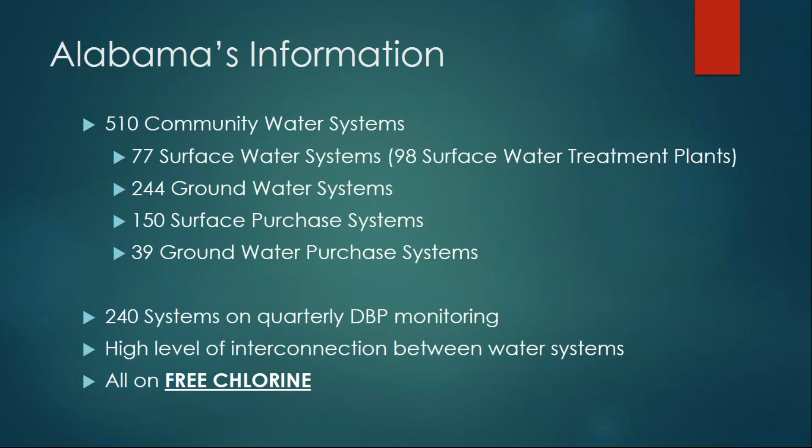Back in Stage 1, the way we originally set it up, the parent system was responsible for everywhere the water went in the beginning. This is back in the early 2000s. So they were actually monitoring the water in the consecutive systems to determine compliance with Stage 1. And that caused some problems, I'll get to that in just a minute.

With that, and the future of Stage 2 looming on us, we decided to make some changes to our Stage 1 regulations. Starting in 2006, we knew we had problems in our distribution systems, but we weren't really sure how much our water treatment plants were contributing to that problem. So in 2006, all of our surface systems had to start monitoring the effluent of their water treatment plant every quarter when they did their Stage 1 monitoring. I'll show you some examples of that in just a minute.

Also in 2006, we altered it so that the consecutive systems had to do their own Stage 1 monitoring. So beginning in 2006, all the consecutive systems that never had to do any disinfection byproduct monitoring suddenly had to start monitoring. And then in 2007, the parent systems were able to pull their monitoring back within their own systems.

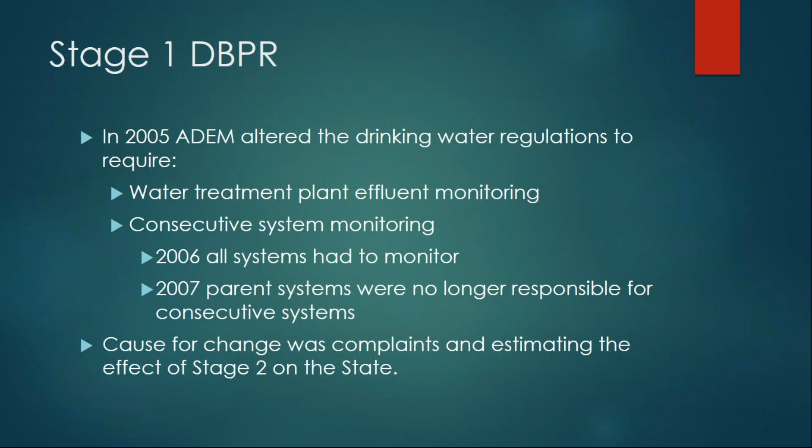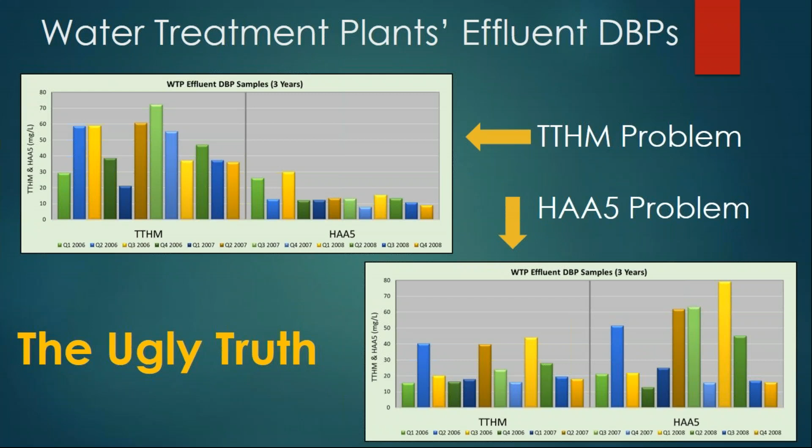So when we started this water plant effluent monitoring, it really started showing us where our problems were. Some water plants like these had to take note and realize that they were the problem. Some of the water plants realized that they were only part of the problem, and then some water plants actually got vindication because they already had good numbers leaving their water treatment plant.

On the next slide here, we actually have to show you some of the improvements our water treatment plants have made. We got the same water treatment plant from the previous slide that had a HAA5 problem. The top chart is their 2006 to 2008 data, and the bottom chart is their 2016 to 2018 data. You can see this water treatment plant has made vast improvements in controlling the TTHM and the haloacetic acids leaving the water treatment plant, and pretty much has met some of the goals we have for the water treatment plant effluent, which we'll talk about later in the presentation.

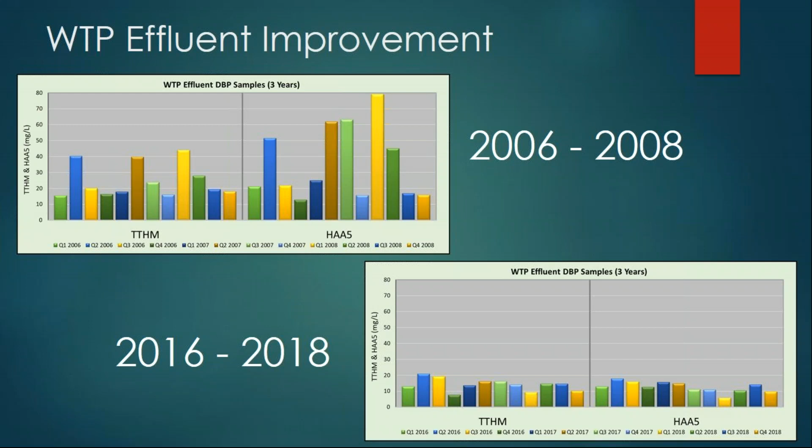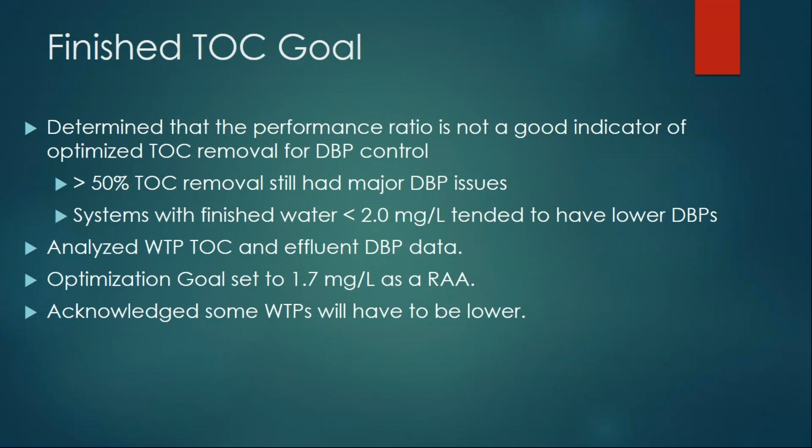But we also acknowledge that in some of our systems, even 1.7 is not low enough. One of the water systems I currently oversee has an actual target of 1.2. Of course, their raw water is below 2 to start off with, but they have to get down to 1.2 to maintain the water treatment plant effluent at good numbers to help maintain their distribution system.

Some of the other things we've noted is, since we've been doing this, we started generating spreadsheets that assist us with different aspects of our program. This is just a couple of the charts off of one of them, and we're talking about this during inspections.

One of the things we started noticing is when we see spikes in the TOC, a lot of times we're also noticing it during the DBP. So we're able to take this out during inspections and show operators, this happened, look what it did to your disinfection byproducts. They're able to begin to realize what was really going on, and they started taking note of this information.

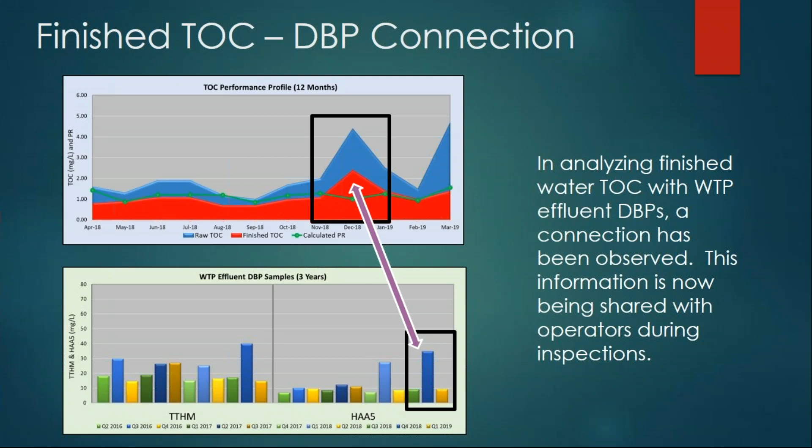With that, it kept going on. We still had a lot of issues between parent and consecutive systems fighting over water quality. Some of them had been fighting since 2006, some even longer, going back to the early 2000s when the parent systems were responsible for the monitoring, because the parent systems back then said, we can't force the consecutive systems to flush, they're causing all our problems, which caused us to put the consecutive systems on their own monitoring.

Then in 2006, the consecutive systems were complaining about the water coming across the master meter, that it wasn't good enough for them to be able to comply. This went on for several years, and as Stage 2 approached, the complaints just kept getting worse from the parent and consecutive systems. So during one of our annual meetings, our branch chief stood up and told the systems to work it out, or ADEM would work it out for them. That's where the master meter monitoring came from.

It's because the systems were still not getting the water improvement that we needed. So in the third quarter of 2012, we implemented master meter monitoring, where the parent system was responsible for monitoring at every point where they sold water to a consecutive system. We just told them it was part of them doing business. We did exempt groundwater systems, unless an issue arose, because most of them had low or non-existent DBPs, so we exempted them unless an issue came up where we needed to have them start master meter monitoring.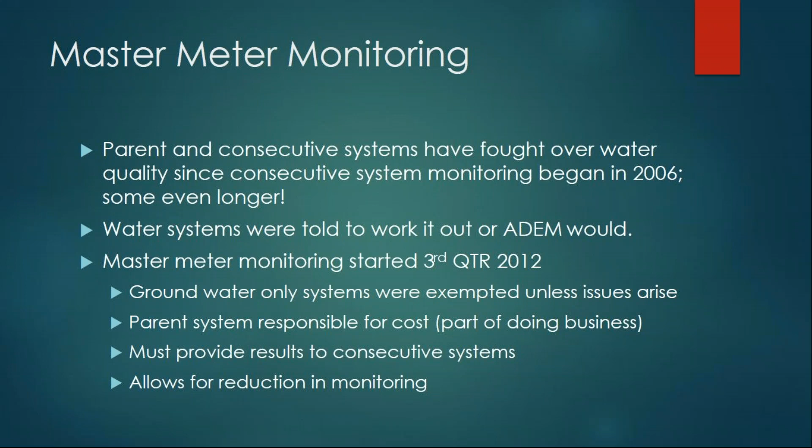The other thing is, even though the parent system is doing the monitoring, the regulation also requires them to provide the results to the consecutive systems, so the consecutive systems are getting that information. We also, in the regulation, allow for reduced monitoring if systems could show that the master meters were not causing a problem for their consecutive systems.

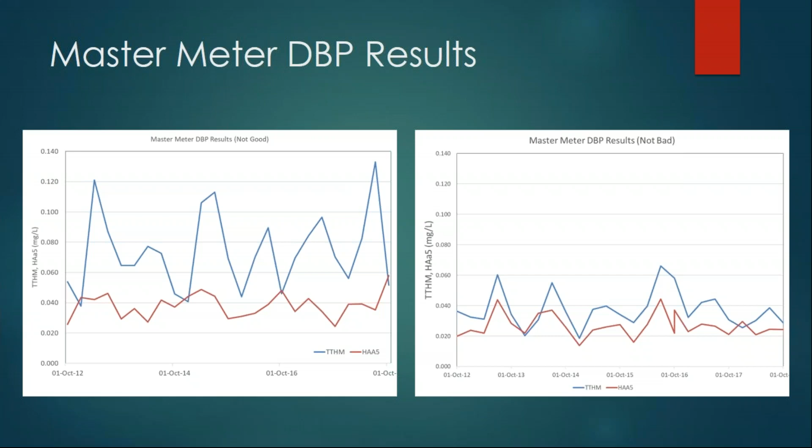When we implemented the master meter monitoring, we started getting a lot of valuable information out of them. Some systems have taken the information and ran with it, while other systems, like the one on the left, are just basically trying to push it off and not have issues, saying it's the consecutive system's responsibility.

Some of the other things we've done in the state is we talk about the operation evaluation. What kind of problems we were going to have with it is, each state had to develop a report for what the systems were going to do when they had an OEL exceedance.

So we designed our report. It does a good job of determining why the source or water treatment plant is the culprit and why it occurred. So it does a really good job for the plant and the source, but it doesn't do very well in the distribution system, mainly because of the lack of information in the distribution system, as there's so many things going on there that can lead to high disinfection byproducts.

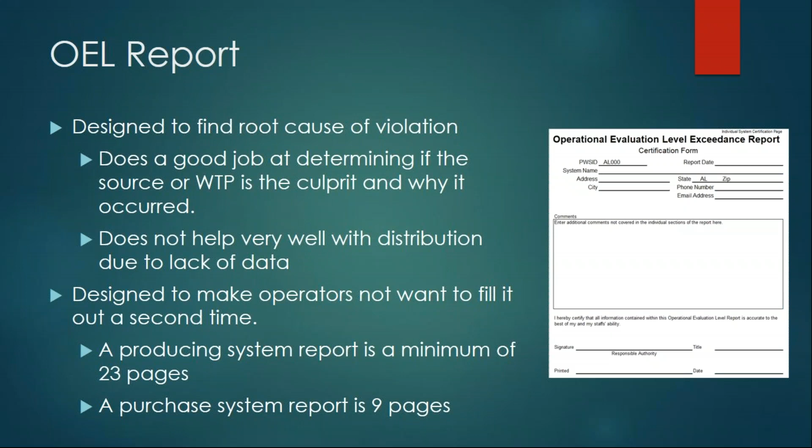The other thing it was designed to do was make operators never want to fill it out again. A parent system to fill it out completely is 23 pages, and a purchase system is 9 pages. We wanted to get the information we needed to figure out what was going on, but it was also designed, hopefully, to lead the operators to think, I've got to fill out another one of these reports, I don't want to do that again. So let's see what we can do to lower our disinfection byproduct numbers.

The other thing we've done, also in 2012, is we instituted the joint OEL and mandatory meeting. What this does is if a consecutive system exceeds the THM or HAA5 MCL, then the parent and consecutive systems have to do some things.

First of all, they have to fill out what we call a joint OEL. Basically all the systems involved, throughout, from where the water is produced at the water treatment plant all the way through the consecutive system that had the violation, all have to be a part and fill out an operation evaluation level report, and then they also have to turn those into the state.

Then after that, all the systems involved have to sit down at a mandatory quarterly meeting to discuss the OEL and the measures that can be taken to reduce the disinfection byproducts, or, if it's an ongoing violation, what current actions have been taken to correct it and what needs to be done in the future. Also, to make sure these occur, they have to submit an attendance list and meeting minutes to the department within 30 days of the meeting.

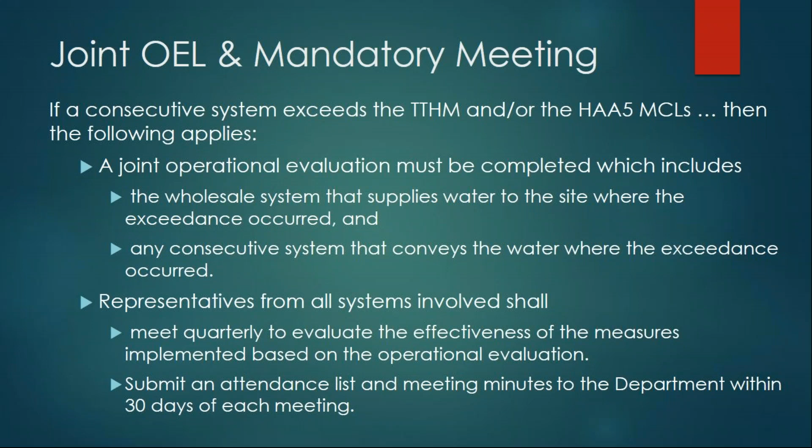The other thing we've done in the state to help with Stage 2 compliance, which a lot of you probably won't think is helping, is that we don't have an initial distribution system evaluation in this state. We just do distribution system evaluations. This was from the get-go, already planned.

Our regulations require our water systems to do a DSE every 9 years or earlier if one of the following conditions is met: the addition of a new surface plant, a new groundwater source not in the same aquifer as other sources, a new purchase connection, system consolidation, or we have a caveat in there as required by the department.

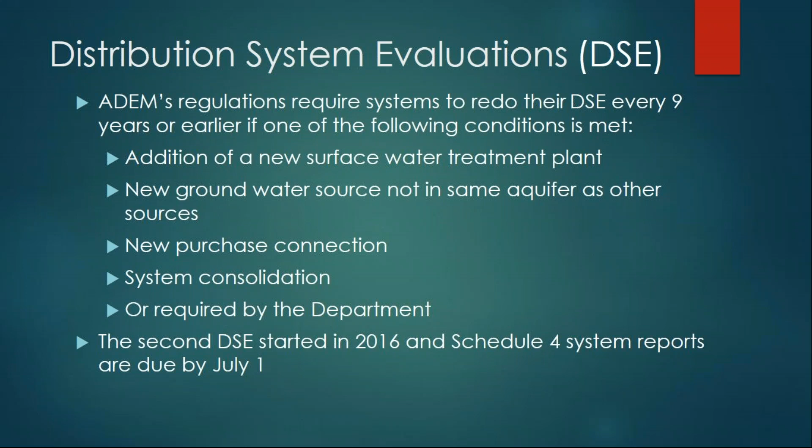The second DSE actually started in 2016, and our Schedule 4 system reports are due by July 1 of this year, so we're in the process right now of finishing up our second distribution system evaluation. Some of the things that came out of that: most systems moved at least one of their max sites, several systems had all new sites, and some of the results from the new sites were 20 to 80 percent higher than the previous year.

So we moved sites and the numbers went up. What that's forcing our systems to do is fix their entire distribution system instead of just fixing one location. They're now realizing they've got to take a holistic approach to their distribution system, because starting in 2024, if they don't fix their distribution system, they're going to end up with new monitoring sites once again, and they'll have to start all over trying to correct their distribution system.

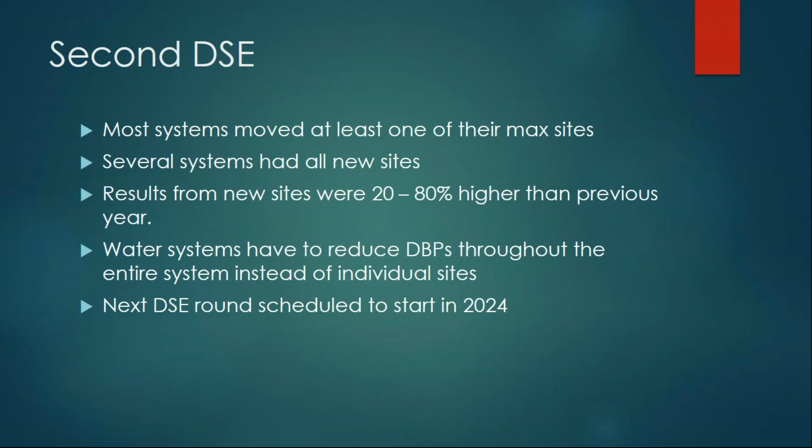A lot of what we've done also came from our Area Wide Optimization Program that we participate in here in Alabama. Alabama joined the Region 4 AWOP in 1997. The initial focus back then was on turbidity removal, because that was the big thing after the Milwaukee incident. It was all about turbidity, but then disinfection byproducts were really becoming an issue, so we expanded the scope in 2004 to include DBPs.

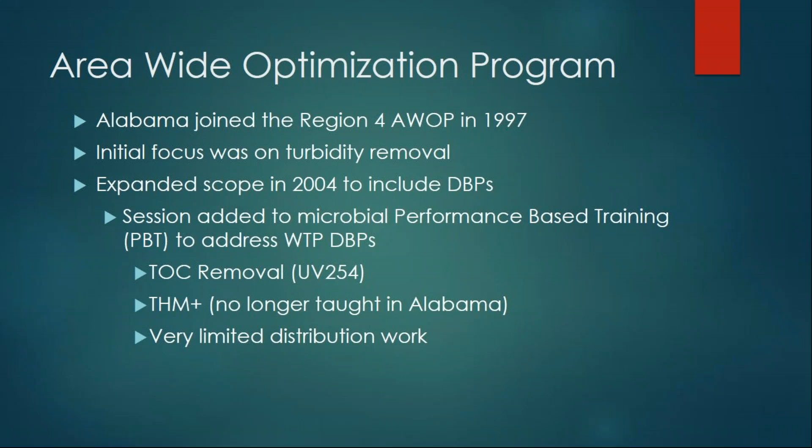What we did was add a session to our microbial or turbidity-based performance-based training to address water treatment plant DBPs, focusing primarily on TOC removal using UV 254. We talked about THM Plus and used it to help diagnose initial problems in our treatment plants. We don't actually use THM Plus in the state anymore due to issues and sensitivities of the results, and there was very little distribution work at that time because we were mainly focusing on the water treatment plants. This was even before we implemented water plant effluent monitoring.

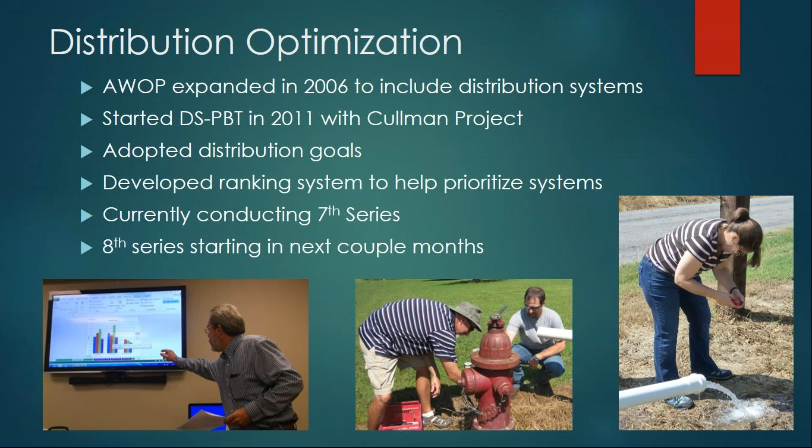Then in 2006 we started expanding to the distribution systems. It was limited — we started talking about the storage tank spreadsheet, looking at turnover time in storage tanks and their mixing. Then in 2011 is when we really started working with our distribution systems with the Cullman project. We adopted distribution goals, which we'll go over in a minute, and started to develop a ranking system to help prioritize our water systems. Currently, we're conducting our 7th series of performance-based training and getting ready to start an 8th series of this distribution performance-based training in the next couple of months.

We have our distribution DBP goals, which are basically for THMs and haloacetic acids, to be 10 parts below the MCL. We also have long-term goals looking at the maximum sites during any quarter for disinfection byproducts, over an 11-quarter time span, almost 3 years worth of data. We want those to be less than 60 parts per billion for TTHMs and 40 parts per billion for haloacetic acids. Back when we adopted these goals, EPA did some analysis and basically determined that if you could get your numbers down to these points, you had a 95% confidence rate of maintaining compliance.

We also adopted water plant effluent goals. So for what's entering the distribution system, we want our water plants to be below 20 parts per billion for total trihalomethanes, 15 parts per billion for haloacetic acids. We also want the TOC entering the distribution system to be 1.7 or less, and also want the water plants to maintain the contact time to make sure the water is properly disinfected before entering the distribution system.

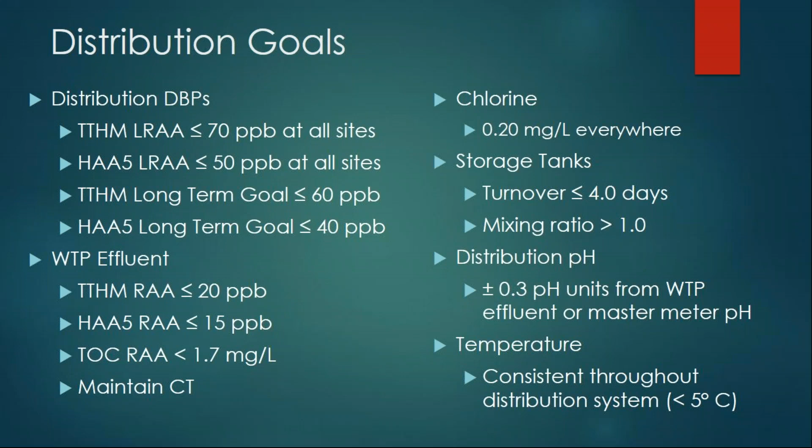And some of the more recent things we found is temperature. Basically, when it comes to temperature, we're looking for the temperature to be consistent throughout the distribution system. It should be less than 5 degrees Celsius difference, preferably less, anywhere you measure the temperature in the distribution system. If you were on the last presentation, I talked about thermal stratification, and systems seeing elevated temperatures in their distribution system. So we want the temperature to be consistent throughout the distribution system.

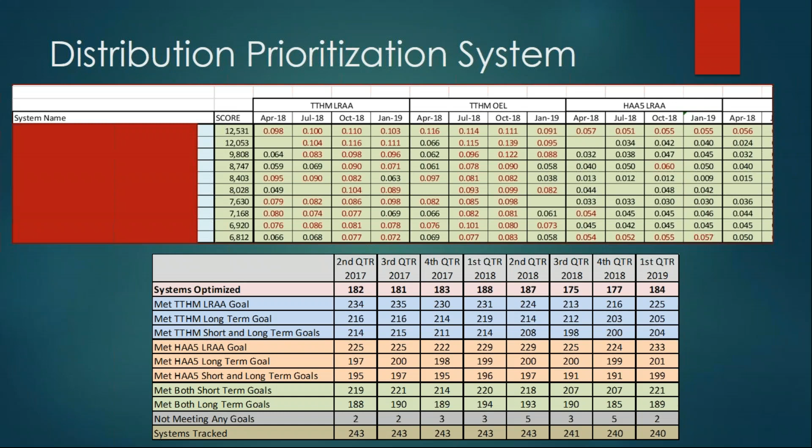So in Alabama, we've achieved increased compliance by being aware of the problem. We have our quarterly status component that we can sit there and look at and see how we're doing. It takes about 20 minutes to run due to automation. Basically, I've got to the point where I sit there and enter two dates, the start date and the end date, and then hit the update button and come back 20 minutes later and it's done. Then I start looking and making sure we're not missing data, and fill out the blanks, and then rerun it if necessary.

It prioritizes systems based upon the disinfection byproduct level. So it gives us an idea of which systems needed attention, and we start going through that list every time we get ready to start something new in our optimization program. We use that list to help us figure out where we need to do our work in the state.

Other increased compliance is by taking a proactive approach at the state level. In 2006, we implemented the water plant effluent monitoring. In 2012, we introduced master meter monitoring, the joint OELs. Also during our inspections, both annual and sanitary, we talk about performance with our systems as well. We not only talk about the turbidity performance, but we also talk about their disinfection byproduct performance, and if it's a surface treatment plant, we also talk about how the treatment plant itself is doing with the water plant effluent and the TOC as well.

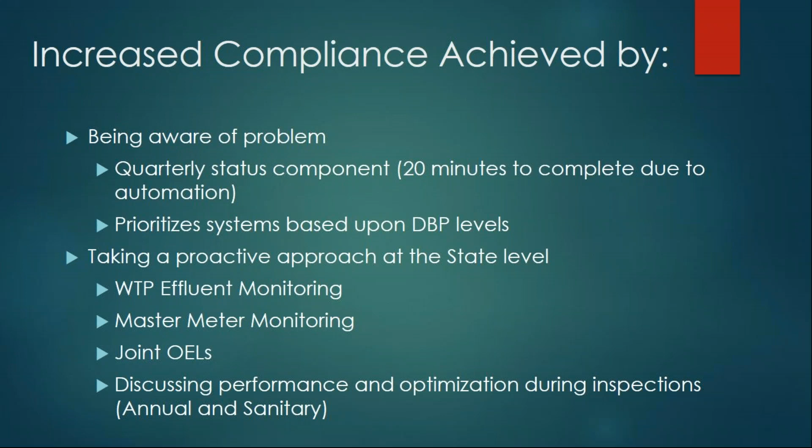Also, educating the operators we found to be highly beneficial. In Alabama, we hold an annual surface water meeting. We've been doing it for 22 years. Presentations at that meeting cover regulations, and cover any topic deemed relevant for our surface water systems, including optimization activities and what other systems have done to assist them in improving their performance. We also have presentations at the Alabama Rural Water Association and the Alabama Water and Pollution Control Association's annual conferences. We hold other classes with different organizations throughout the year.

A lot of the spreadsheets that we develop, we also hand out to our water systems, so they have access to all of our spreadsheets as well. Performance-based training is one of the biggest benefits we've seen, because when we do distribution performance-based training, we target the parent and the consecutive systems. So if a consecutive system is having issues, or the parent system is having issues, we look at that and we bring in all the systems for that parent system. We try to target one area and pull them all in together, and try to get them to start working together, similar to what Jackie was talking about.

It teaches operators to diagnose the problems, so they begin to learn how their distribution system actually functions and works, and they get a better understanding about what's going on in their distribution system. It also teaches state staff how to help with issues, because as they go through these training classes, they're learning as well, able to help not only the system going through the training class, but other systems that they oversee.